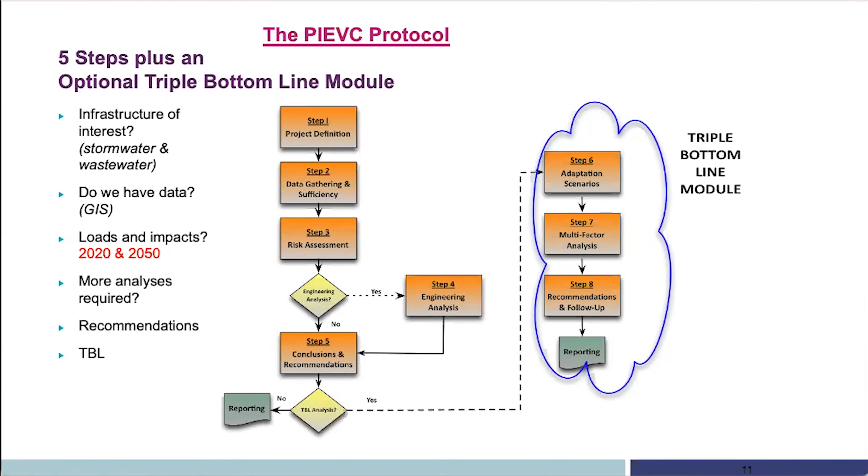So we looked at a long list of climate variables - temperature, rain, snow, winds, and fog, to name a few - and then looked at what these climate changes might be into future timeframes, 2020 and 2050.

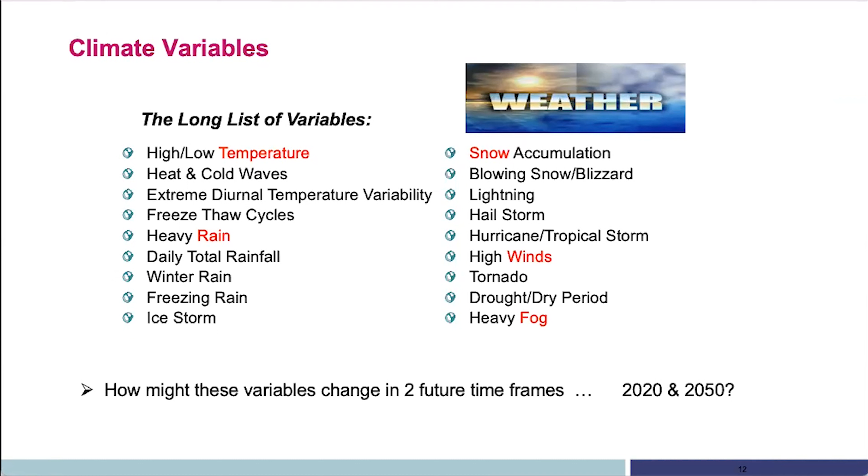So just to highlight a few of the general outcomes that we found from the study looking at the climate variables changing: the number of days per year with temperature exceeding 35 degrees Celsius was to remain the same through 2020, but was expected to increase 4 times into 2050. The number of days per year with temperature below -20 was expected to decline through 2050, as were the days per year of freeze-thaw cycles. Rainfall and severity of rain was expected to increase, and the occurrence of drought-dry periods was expected to double through 2020. The report and study was completed in 2012, so 8 years prior to that date.

So, next slide, please.

So I mentioned that there was this add-on feature. It was really the impetus for the project, but it turned into a component of the study: an assessment of the current city's IDF relationship. There was 40 years of data that was available and reviewed and used for the study. 112 global climate models were run, and the output was used to predict the 2 future IDF curves for 2020 and 2050. One of the interesting outcomes we found was the current IDF curve that was used was actually a 1963 curve based out of Buffalo, New York. We found it to be quite conservative compared to the future 2020 and 2050 curves for the more frequent storm events. We believe that was because of the location of Welland being a little bit more inland compared to Buffalo, which is at the eastern end of Lake Erie and does experience a little bit more extreme weather events. So that was our rationale for that.

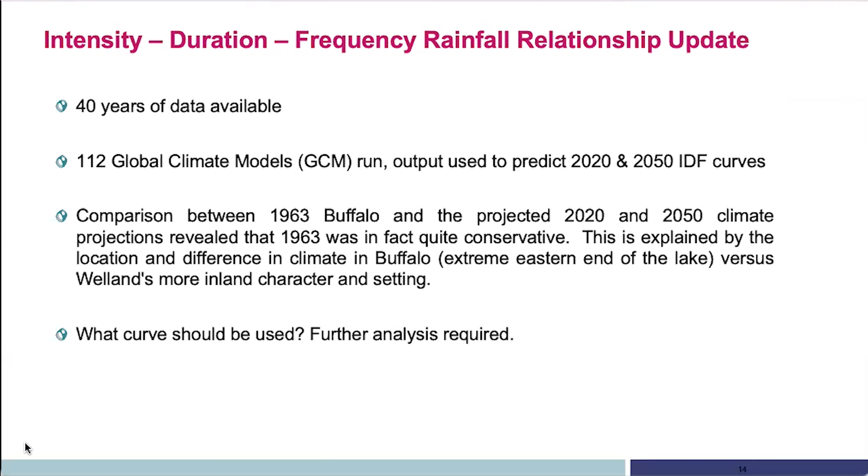So the risk assessment portion - I really found this one of the most interesting parts of the whole process - was to create this matrix with climate parameters across the top and infrastructure components along the side, and then to sit down with many subject matter experts and essentially populate the matrix, assigning probability and severity scores, and then ultimately doing the risk calculation for all those scores and determining which associated component was one that we should be focusing our time and energy on.

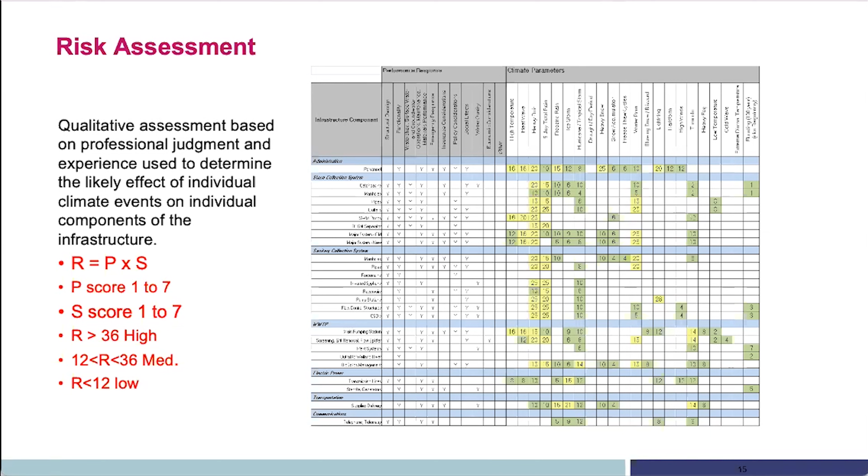Out of the study came 44 recommendations, grouped into different categories. We looked at short-term, medium-term, and long-term recommendations, and initially focused on two short-term recommendations: should we be updating the IDF curve for the city, and should we be looking at increasing or revising the storm design standard for the city.

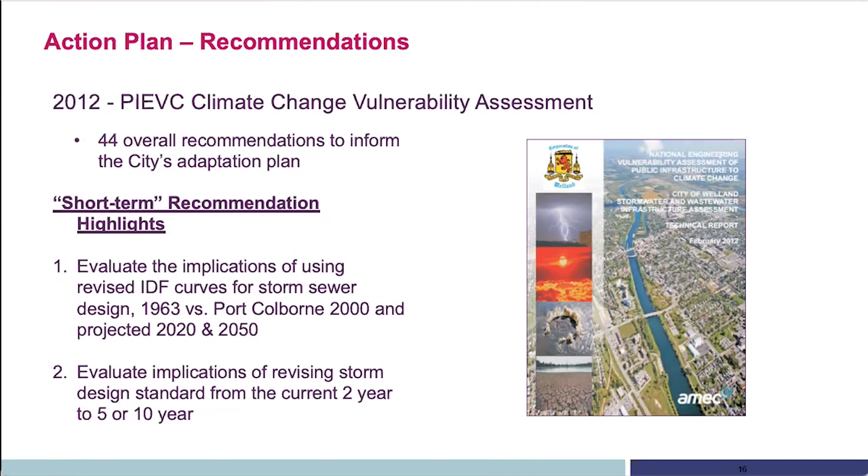This leads into the follow-up to what we did after the study. I wanted to share a few slides on that. We took a look at a local residential subdivision, 25 lots, a smaller development that was already built and serviced, and looked at what that subdivision servicing would look like if we designed it again, considering climate change.

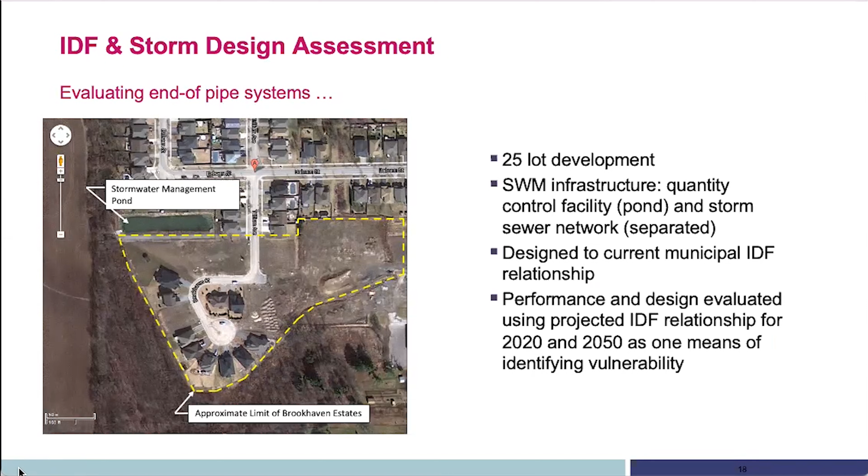On the major events, we looked at the pond first. With the pond being designed to a 100-year storm, we found that the current design using the 1963 curve was providing for some freeboard, approximately 5 inches. But looking at designing it again using the future 2020 and 2050 IDF curves, allowing for climate change, in both scenarios we found that the pond would actually overtop, which was an interesting finding.

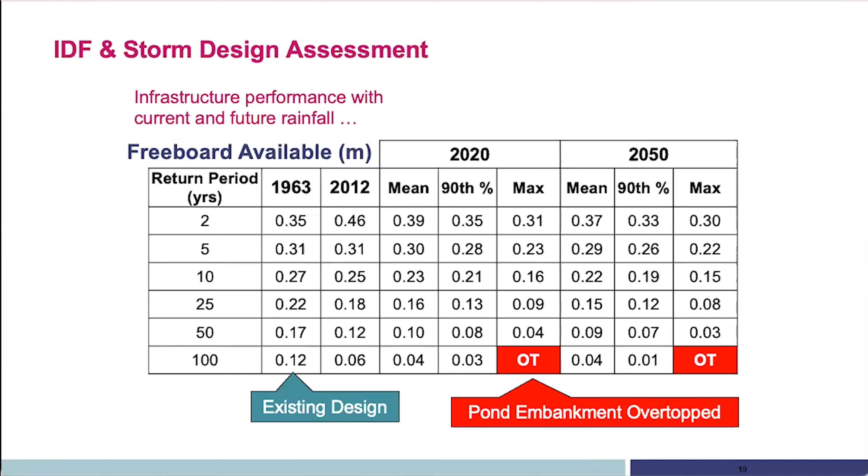We decided that this was great information, but it was important to do a little bit more ground truthing before we actually made the jump to make some changes.

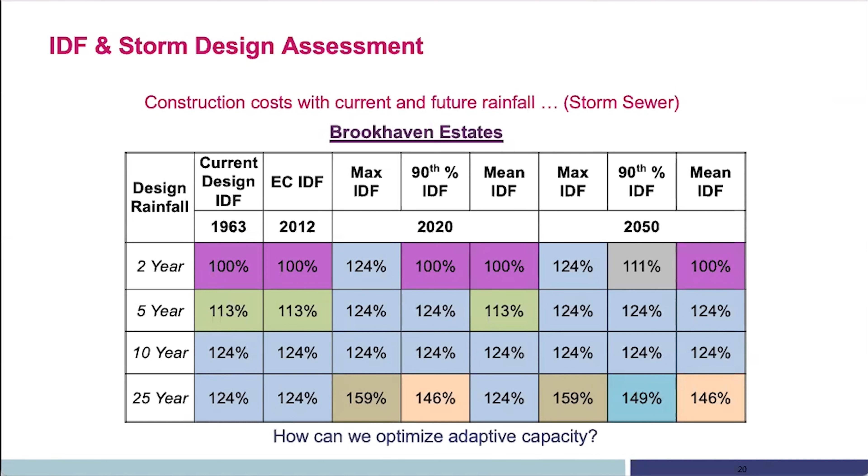So what we decided to do was look at a little bit larger sample. We looked at a 20-hectare residential development that was already built and serviced, but had experienced some recent flooding events directly related to the stormwater management pond.

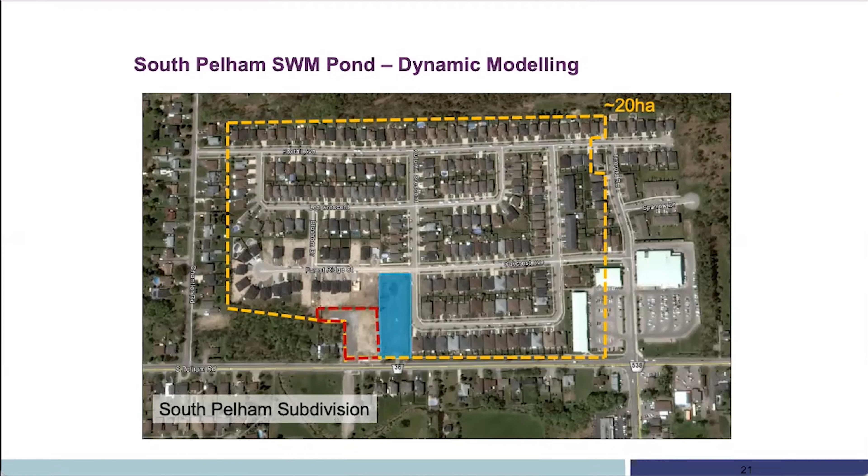One more click to bring up the pond - that's where the stormwater management pond was located, built as part of the residential development. There's a dashed red line, which is another local development that was coming to be a component of the residential subdivision, but it would end up taking up all the available surplus land adjacent to the stormwater pond.

Some of the findings from that study were that there would be an 18% increase in spill flow from the pond comparing the 2020 IDF to the current, a 15% increase in peak spill flow between the 2050 and 2020, and about a 35% increase in peak spill flow out of the pond comparing the 2050 to the existing IDF.

Fairly significant. So we went back and asked what are we going to do about this. We did a complete pond cleaning and had an overflow pipe installed so that it would essentially alleviate any future flooding within that development.

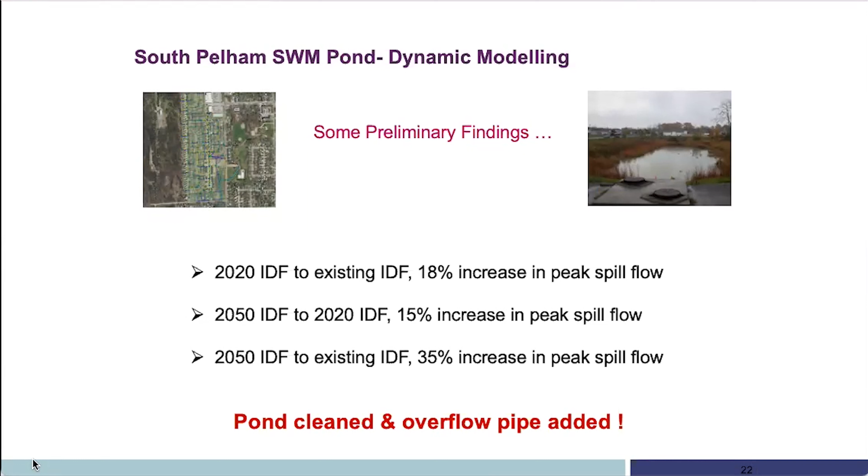I just wanted to finish off on what we then decided to do with all of that information. We had the PIEVC study, we took a couple of recommendations, and we did some additional analysis and investigation with that.

So essentially the position we were at was to do two things. One was to look at updating our municipal design standards - essentially increasing the storm design from the current 2-year to the 5 or 10-year, using the work we had done to support those changes.

And then additionally, the IDF curve, replacing the current 1963 curve with a future 2020 or 2050. And then the final piece of work that we were doing was essentially assessing the rest of the storm ponds within the city for climate change vulnerability.

So we found that the one pond was certainly impacted by the larger storm events and the future storm events that were being predicted. How would the rest of the ponds in the city perform under the same kind of scenario? So that's essentially where we were at with this study. And next slide, please. I think that's essentially it, and hopefully I'm okay for time.

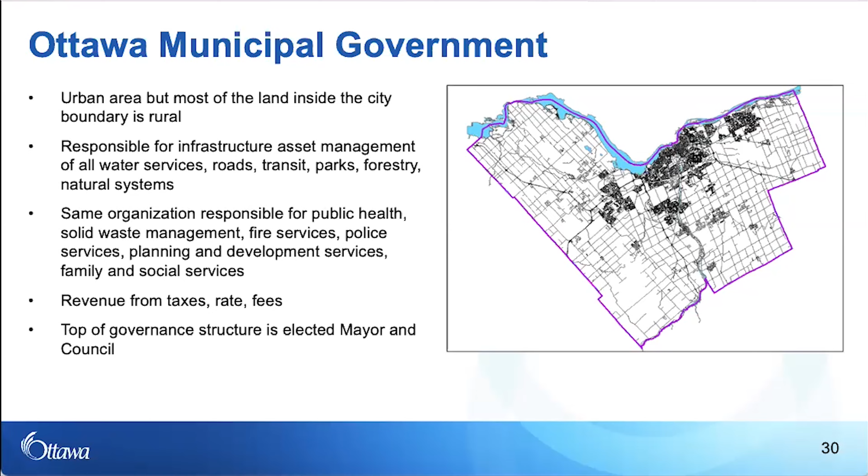And unlike some utilities or other organizations, just to be clear, we are a municipality, so the top of our governance structure is not an engineer or a technical manager. It's the mayor and council, and they are responsible for all of those things above. Next slide, please. And so let's transition now to what you wanted to hear about, our PIEVC studies.

Next slide, please. To start, I'll talk about this project, the Graham Creek Stormwater Infrastructure. Graham Creek, we call it a stormwater infrastructure. The project dealt with a multi-segment culvert system in an urban creek. It's also an outlet for the storm sewer, so the storm sewers connect to the culvert itself.

Based on condition alone, the system required renewal. It actually is buried quite deep as it crosses under railroad tracks, and it crosses over a very deep trunk sanitary sewer. The culvert and the creek itself are very close to adjacent properties and homes, and it's not a straight alignment, so it's not a very straightforward set of infrastructure system.

The interesting thing here for me is we were doing this design because of condition. That was already well underway, but we thought there's an opportunity here to use the PIEVC analysis to understand what recommendations we might generate for dealing with climate change. So this was our first opportunity to test the PIEVC protocol on our infrastructure and really to build staff capacity. So we weren't mandated to do this, but we wanted to understand how this protocol worked, build staff capacity.

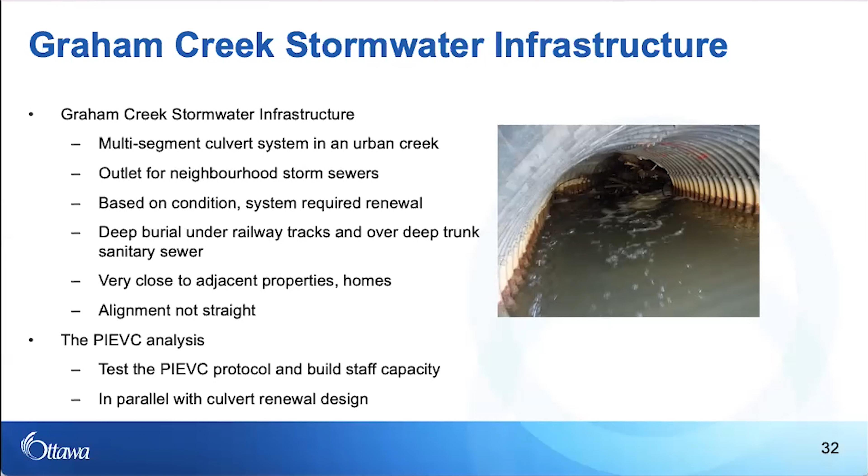And so what happened is we had a kind of a natural experiment, because we were doing this in parallel with the culvert renewal design, and we were going to see how the recommendations coming out of the renewal design that weren't considering the PIEVC analysis would compare with the recommendations coming out of the PIEVC analysis. Next slide, please.

So just to cut to the answer, what we found, and I think this is consistent with what I've heard in other jurisdictions as well, PIEVC works very well, or it did for us, for critical, complex, and large infrastructure design and renewal. In particular, and this is something that not all of our subject matter experts were really thinking about at the beginning of the project, it was great at helping identify risks and solutions for non-ideal conditions.

And what I mean by that is oftentimes we look at a culvert and we try to understand the hydraulics, the hydrology, how big should it be, what are the losses, things like that. But the PIEVC protocol really challenged us to think about things like debris that might be coming down the creek when we had large rainfall events, but also windstorm events that create branch debris.

To be completely fair, we kind of knew about that anyways, but it was one of the reasons we needed to renew the culvert system. There's a large tree trunk stuck in the middle of the culvert, but the PIEVC protocol really helped us focus on not only normal culvert design, but these non-ideal conditions.

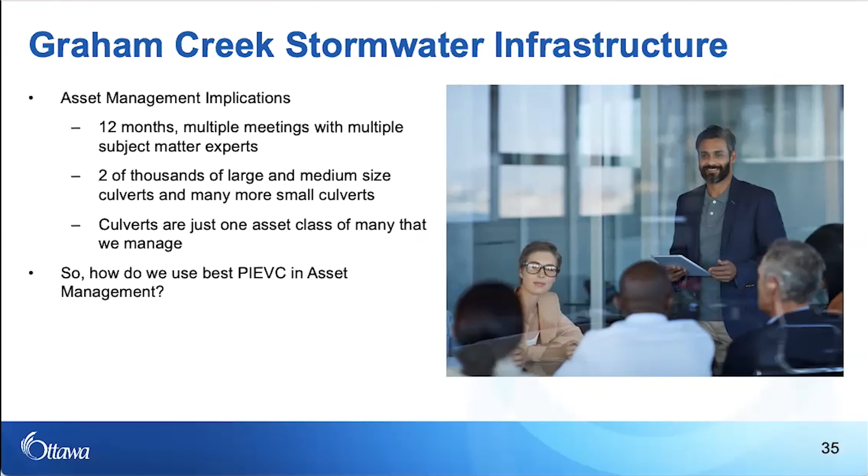Next slide, please. And post Graham Creek study, we did another small study where we tried to pull apart some of these questions. We acknowledge that this is one asset in isolation from other assets in the same class. And just looking at one asset at a time, we don't have this general knowledge of the state of all assets. In the case of Graham Creek, we did the study because the culvert was at its end of life cycle. But was that good enough for all the other culverts to wait until the end of life cycle? That was one of the questions we had.

We also knew that the analysis was in isolation of the broader understanding of risks and needs of all the other assets in that class. So in the case of Graham Creek, we found that it had a lot of capacity for climate change. But if it didn't, how far would we go for one culvert? And would that be something that we could replicate for all other culverts? And these are questions that we were asked by council and residents. Why did you go so far in one case and not so far in another case?

And some other questions that we were asking ourselves: can we build on past risk assessments that we've already done? Can we use the PIEVC protocol to understand our risks for non-ideal conditions or where there are interdependencies? And can we use those risks to prioritize our next actions? Next slide, please.

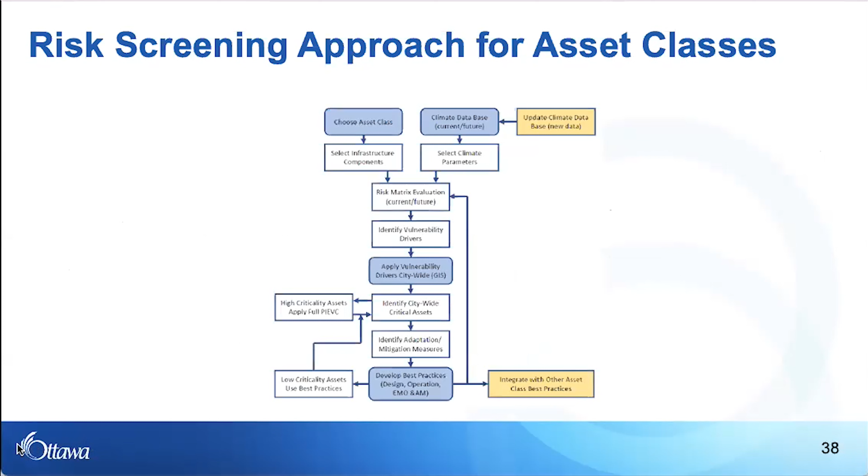We'll skip this. This is just a visual conceptualization of what I just said. Next slide, please. And so, great. I was energized. I was ready to start using this new screening process or further developing it. And then what got in the way of me doing climate change adaptation work? Well, it was climate change adaptation work, because in the meantime, council declared a climate emergency.

We were citywide doing a climate change master plan. We were doing new asset management plans that needed to consider climate change, updating our infrastructure master plan that needed to consider climate change, and updating design guidelines that needed to deal with climate change. So all of these new or emerging pressures kind of put my risk screening protocol in the background. Next slide, please.

But actually, it was useful to have thought through that risk screening process, because what we decided at that time is we should do one citywide climate risk vulnerability assessment. In our case, for all water services; there was a larger group doing it for all the other city assets and functions and services. But we could actually get some of what we wanted out of the risk screening process out of that process. We could have, for example, standardized climate parameters and interactions and vulnerability descriptions, and so on.

But the question we asked ourselves, and the question I'm still being asked today, is what's the use of doing this at such a high level citywide? Is it going to tell our operations staff to do anything different? What are we getting out of all this activity? And it may be for some a little disappointing, but I think many of the benefits come from an asset management or just an infrastructure management perspective.

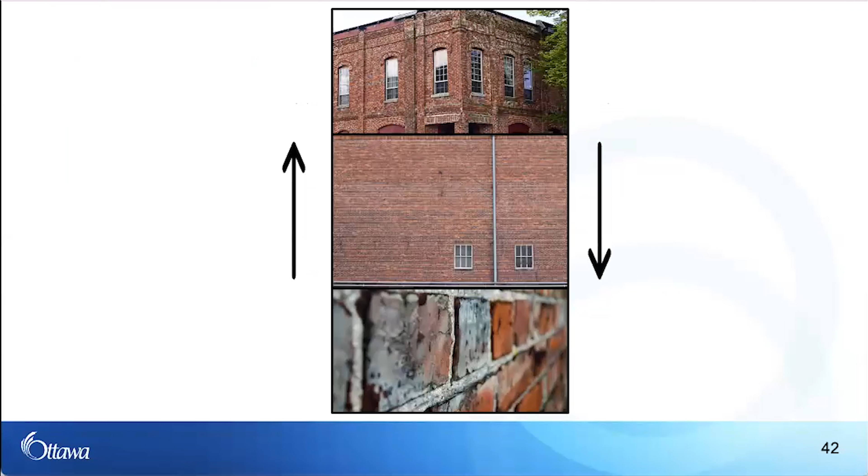Next slide, please. And so some final thoughts. I hope I didn't go too far over time. The next slide. What we found in this process, it was useful to look at PIEVC or risk at many different scales, because you see different things at different scales. And I might have thought, well, there's a right way to do it. You do it from the top down or the bottom up. But we found that it was valuable to even skip around a little bit, because each level kind of informs the other levels as well.

Next slide. And so just really quickly, my final thoughts: PIEVC Protocol, I found an extremely valuable tool for Canadian engineers. It's easy to follow, provides clarity on how to address climate change and infrastructure design, helps us navigate issues of imperfect infrastructure data, helps us deal with uncertainty of future climate conditions. And in particular with asset management, I found it useful to adapt this and other tools for different purposes. It's not that the PIEVC protocol isn't useful at other levels, but we may just have to rethink what the output means, or perhaps do it in different ways.

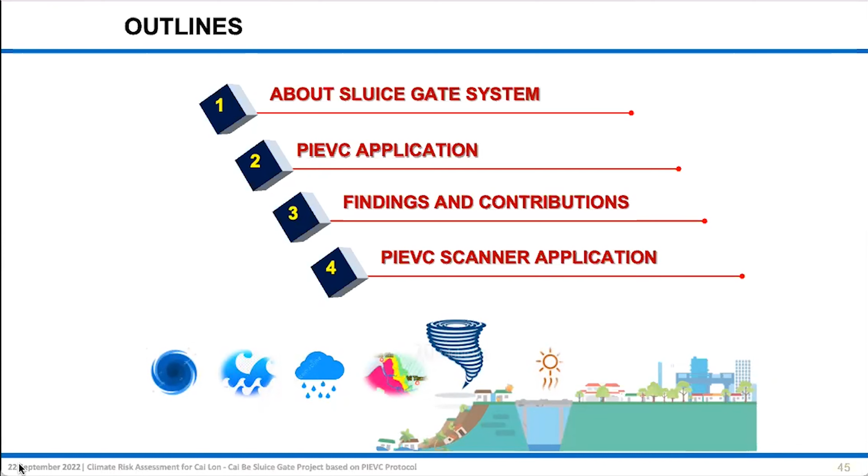And the Vietnamese government recognizes the current and future challenges regarding climate change and man-made development, so the government is very concerned in terms of developing the strategy for climate change adaptation in the Mekong Delta. That's the reason why we invest in some of the infrastructure. Here is the Cái Lớn Cái Bé sluice gate system.

As you can see in the black box, the rectangular box indicates the location of the Cái Lớn Cái Bé. The system includes two big sluice gates: the Cái Lớn sluice gate and the Cái Bé sluice gate. The Cái Lớn sluice gate has 11 gates and 2 ship locks, while the Cái Bé has 2 gates and 1 ship lock. They are a multiple purpose construction with 3 main objectives.

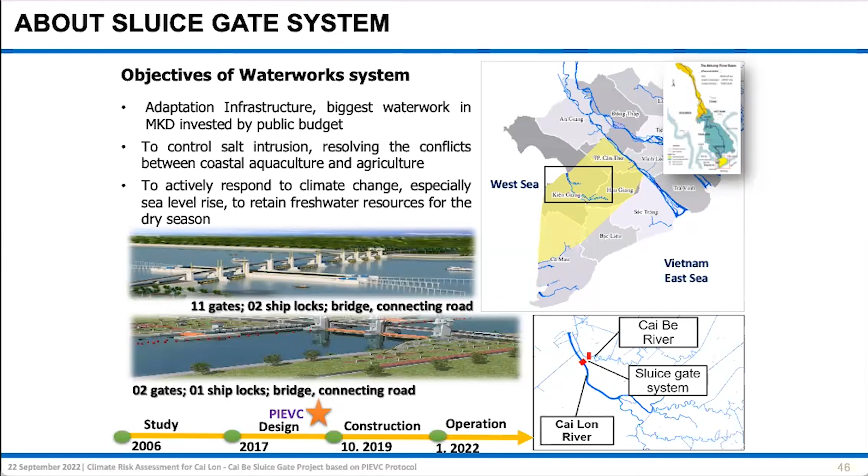To be honest, at the first time when we heard about the PIEVC, it was new to us. We didn't know how to use this.

Luckily, we got support from the Canadian expert, and the core study team gathered various experts from engineers from our institute, climatologists from the Southern Regional Hydrometeorology Center, and the project owner from PMU10 under MARD. We also had economics experts. Along with that, we had advisors and information suppliers from MPI and MARD, and other experts to support us during implementation of the PIEVC application.

As I mentioned, the PIEVC was new to us at that time, so we adopted a coaching approach. That means we got training from the Canadian expert, and then we applied what we learned directly from them. Along with that, we also had back and forth meetings online and offline with the international expert to get their comments and advice while we applied this protocol in Vietnam.

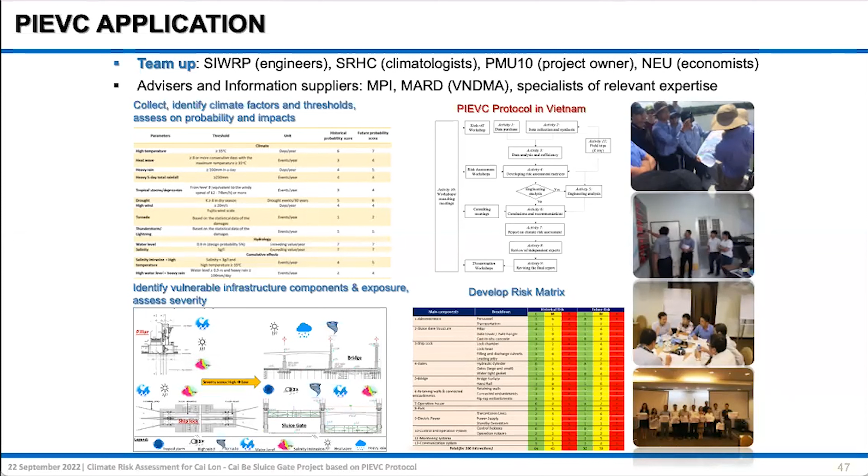Next slide, please. Here is the risk assessment matrix for historical conditions. I don't want to go into detail, but I should pick out the significant point here. As you can see on the slide, the red circle illustrates the result of the risk score for the ship lock, caused by hydrology and salinity. In the historical condition, the risk score is 8. However, it increases in the future.

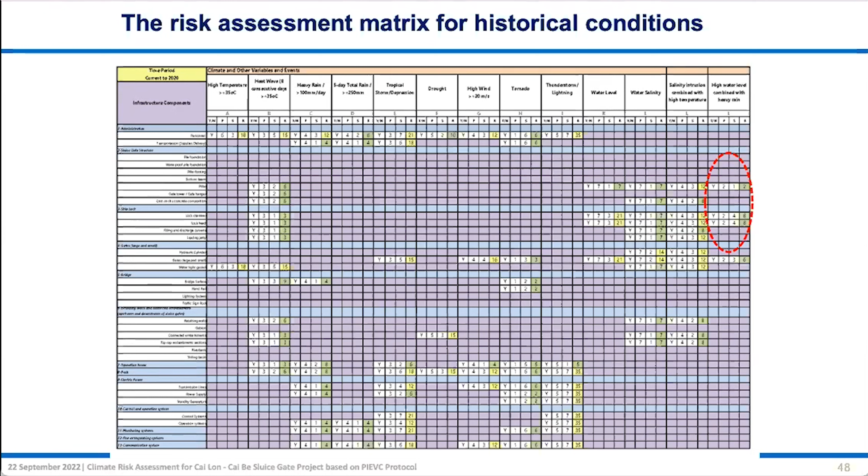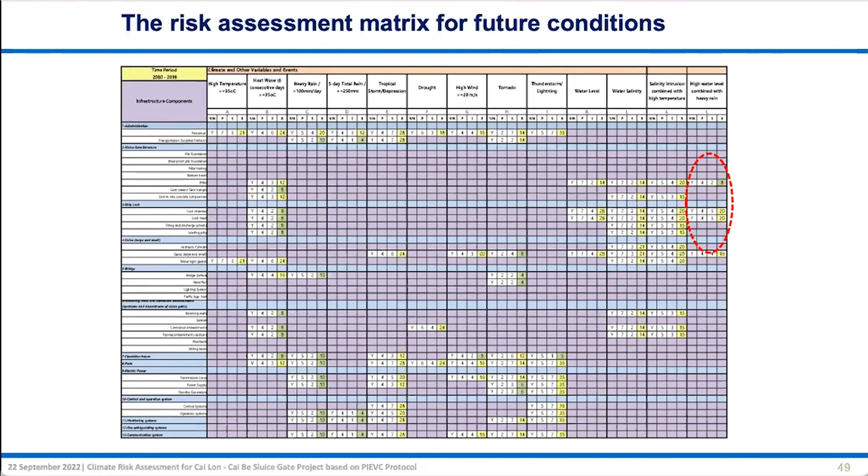In the next slide, please. In the future, the risk score of the ship lock regarding the hydrological driver increases to 20. That means in the future, the ship lock could be at risk regarding the hydrology driver, and this informs us that we need to make some solutions now to ensure the resilience of this component in the future. Next slide, please.

I would like to summarize some of the findings and contributions of our work for the design of the project. The findings are summarized corresponding with each component, for example the concrete component, mechanical component, and operational staff. For each component we determine the specific climate factor.

For example, for the concrete component of the pillars or the shiplock, we determine that high temperature, heat and heat waves, water level and salinity are critical factors putting the concrete component at risk in the future. As a result, we recommend increasing the quality of the concrete grade for this component, and coating methods such as Epoxy should be applied.

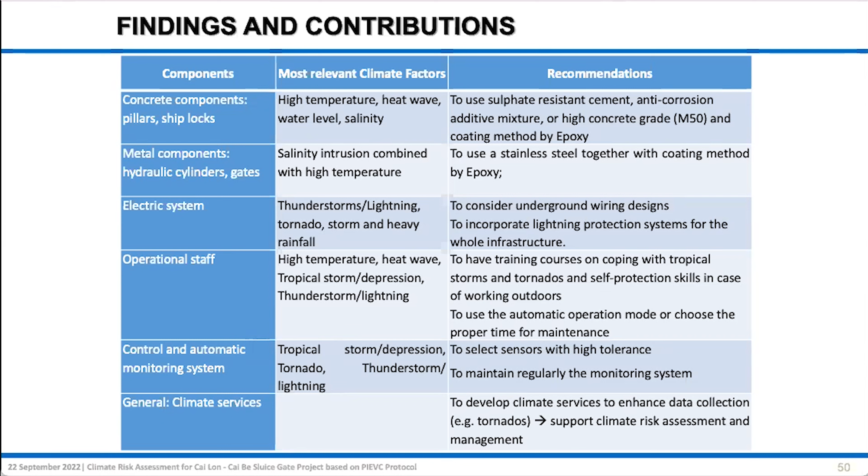Another example regarding the electric system: based on the results, we find that thunderstorms, lightning, tornadoes, and heavy rainfall put this system at risk in the future. So this system should be placed underground to ensure the operation and maintenance of the sluice gate operation in the future.

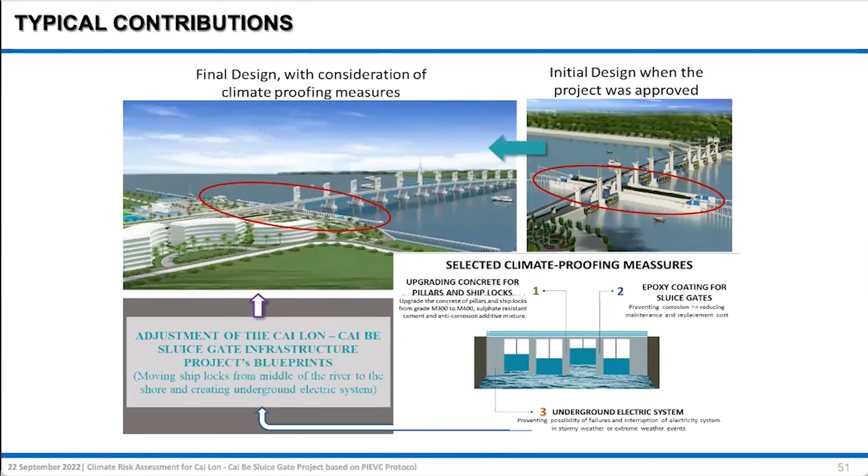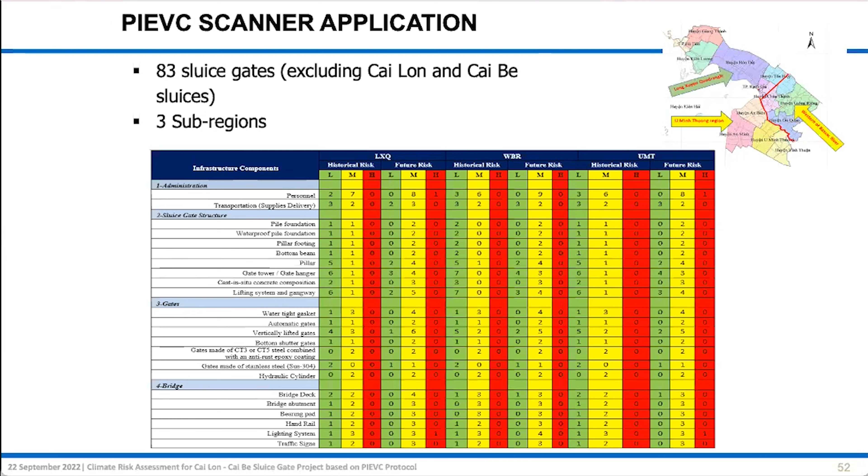Particularly, the risk in the future increases for some components such as the sluice gate or the gate project. This result informs the authority of the need to carry out some solutions to maintain their sluice gates in order to make sure they work well in the coming years under climate change in the Mekong Delta. Next slide, please.

For the conclusion, I have 5 observations and remarks. First, we realize that PIEVC can contribute to or enhance the resilience of the proposed design, particularly in the Cai Lon – Cai Be sluice gate project. It also contributes to increasing resilience for existing infrastructure, and it could help increase the lifespan of the infrastructure.

The second thing is that PIEVC has potential to be applied, replicated, and extended in Vietnam in the Mekong Delta. For sure, it should be updated or localized to adapt to local characteristics. For example, in the original PIEVC, we realized that it doesn't account for salt intrusion or water level, something like that. But when we applied it in Vietnam, we added some local parameters for the Mekong Delta into the PIEVC.

Future PIEVC applications will be cheaper, faster, and easier. We think that because we have the copyright and can reuse the data we purchased for one piece of infrastructure in the same region.

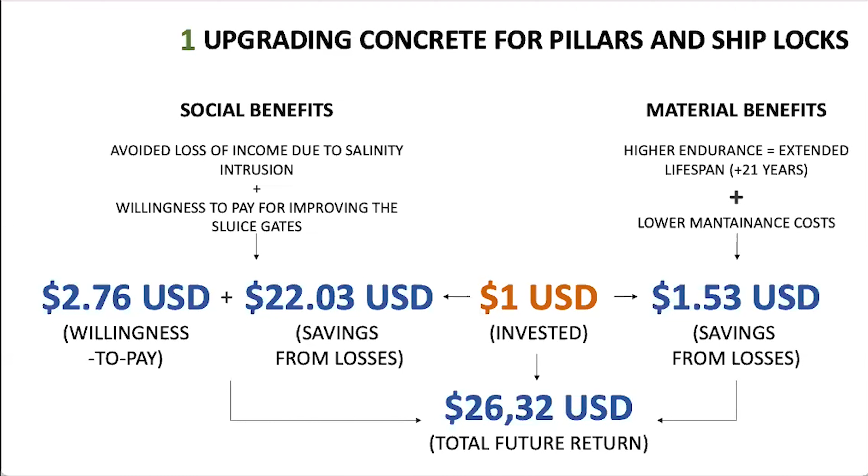As you can see on the slide, this is the cost-benefit analysis for upgrading concrete for pillars and ship locks.

Next one, please. And also for coating, changing the coating of the sluice gates.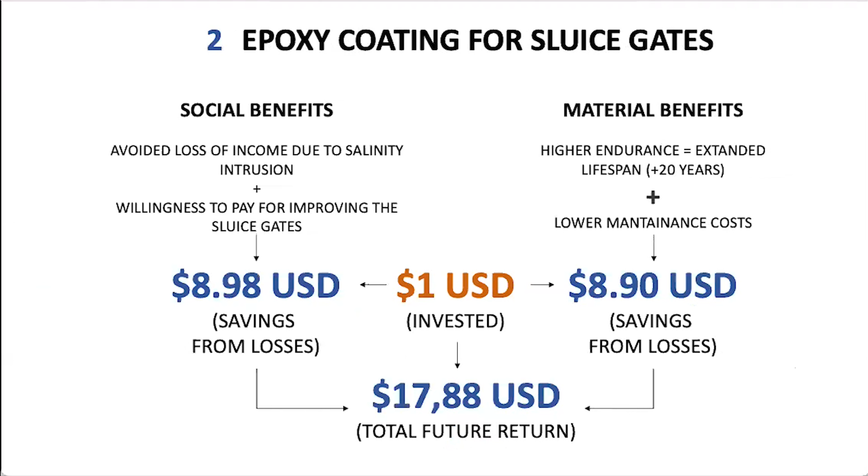And next one, please, for the underground electric systems. So I just want to show you

the numbers on these 3 slides, because the result of the project's cost-benefit analysis is actually an example that can act as a quantitative measure that could be extremely useful for investors and political decision makers in the process of

integration of climate change adaptation measures into sector policies, and institutionalizing climate risk assessment and cost-benefit analysis of climate-proofing measures.

This can also be an obligatory step in project approval, specifically for projects related to climate-vulnerable infrastructure or infrastructure in

vulnerable areas. We can also look at the possibilities of standardizing technical norms or costs for construction, for the technical

and operation design of infrastructure. And we can also look at climate risk being included in the risk management process by

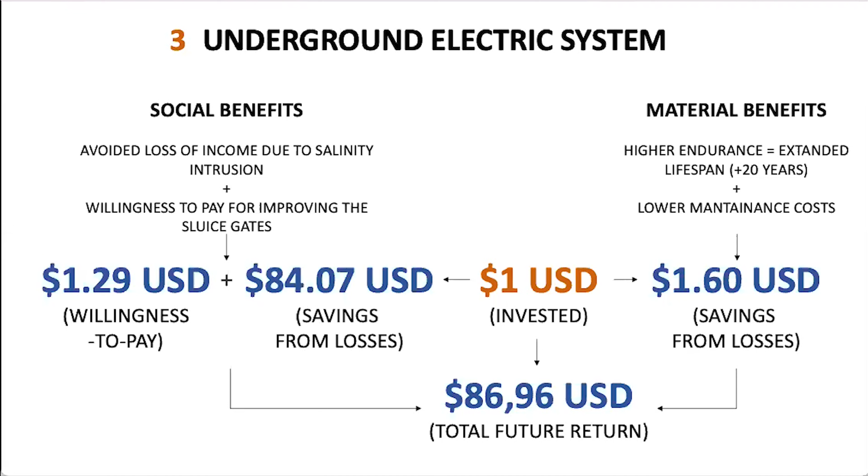banks, insurance companies, or risk transfer agencies, or in the process of approving funding or loans for bankable infrastructure investment projects. Sorry, next slide, please.

As for Vietnam, next one, please. We are now becoming more and more concerned about the resilience of those critical climate-vulnerable infrastructures.

And we have more enhanced awareness and focus on the capacity of the institutions related to the resilience of infrastructure against climate change, as well as

we have reflected those awareness into our policies. And recently, at the highest level, we have the Law on Environmental Protection, which mentions the requirement to assess climate impacts in the environmental strategic assessment

process. We also have our national climate change adaptation plan for the period 2021-2030, with a vision to 2050, which mentions enhancing the climate resilience of infrastructure, and also

our green growth strategy has included the orientation toward sustainable infrastructure. And climate resilience is also included in our national scheme for systematic infrastructure development in Vietnam for 2021-2030.